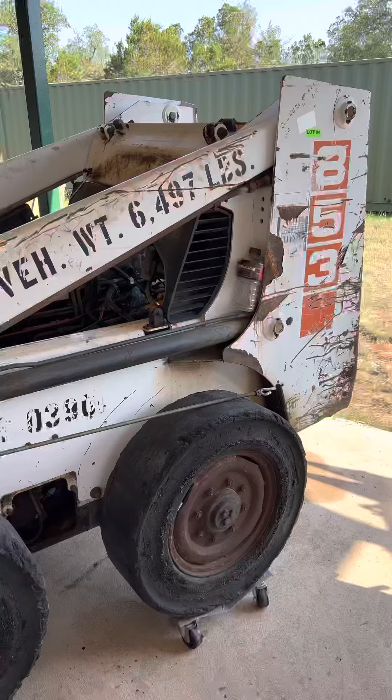So this is my new to me 1993 Bobcat 853. I bought this from the State Federal Property Agency in South Dakota. Brought it back down here to Texas.

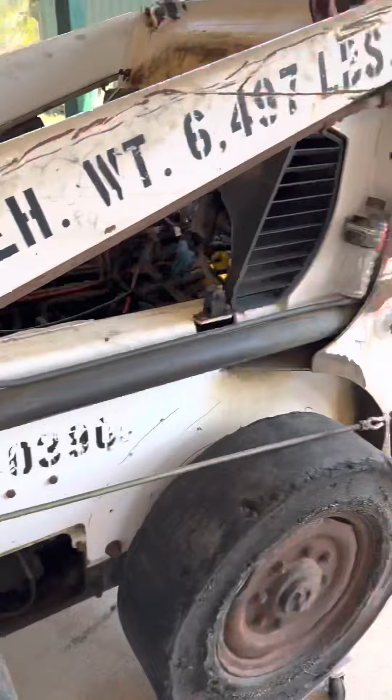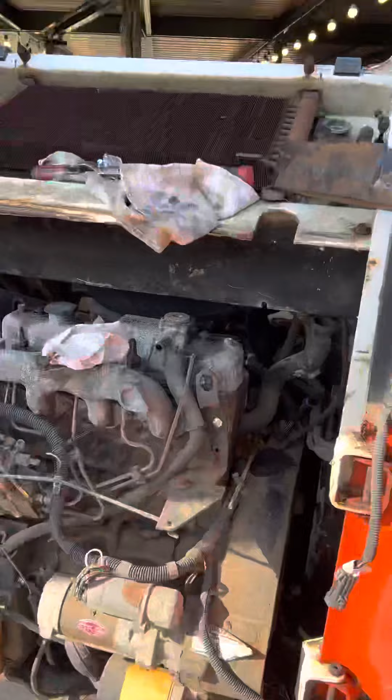I think originally it was a Navy vehicle because they've got all the markings on there with the weights, and also because there's a form in there from NavSup, the Navy Supply Group. So I think the Navy had it first, and then the guy in South Dakota told me they bought it from the state of Georgia, who bought it from the Navy after they were done with it. There's some intra-governmental agency deal. In June of 2020, the South Dakota people bought it from Georgia, and I think it came from UGA, hence the sticker - excess federal property. So UGA had it for who knows how long, until 2020 when they sold it.

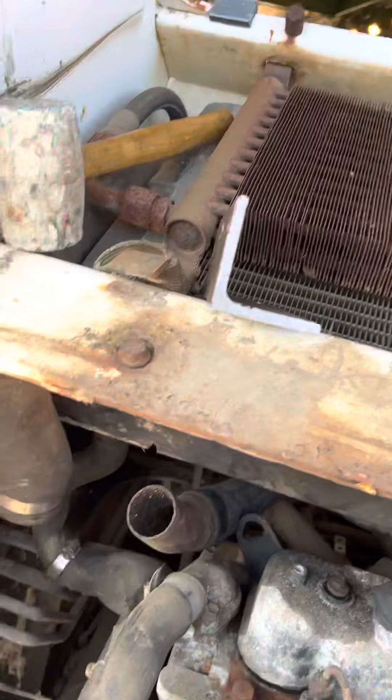The guy from South Dakota said as soon as it arrived in their shop - they buy these things sight unseen - their mechanic looked at it and said, nope, not going to touch it. So it sat in South Dakota for 2 years, from June of 2020 to now, May of 2022. I guess they're prohibited from selling it otherwise.

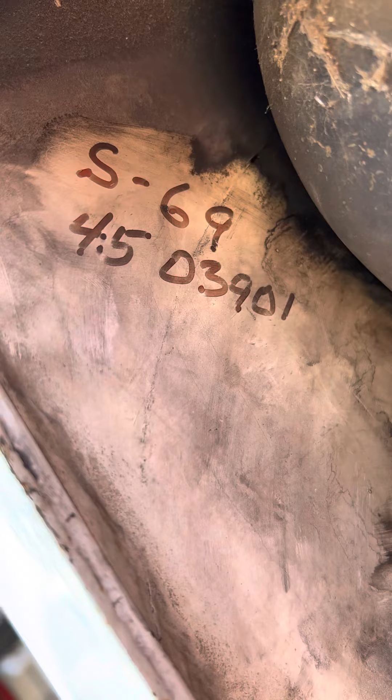If anybody happens to know what these markings are - 4503901 - I'd love to hear that. I saw that also marked in here. Some mechanic wrote that in there. They wrote 4.5, or is it 4:5? Hard to tell. So my goal was to see what it looks like.

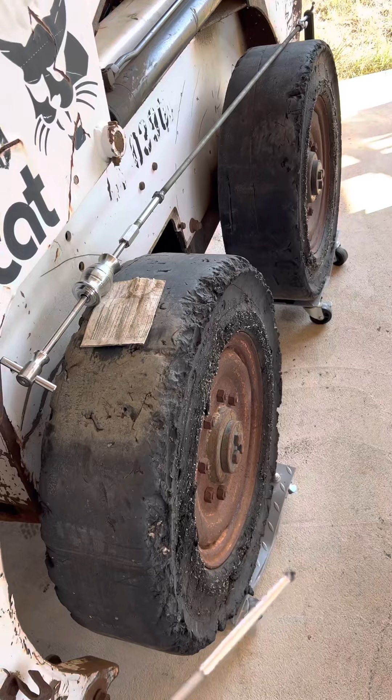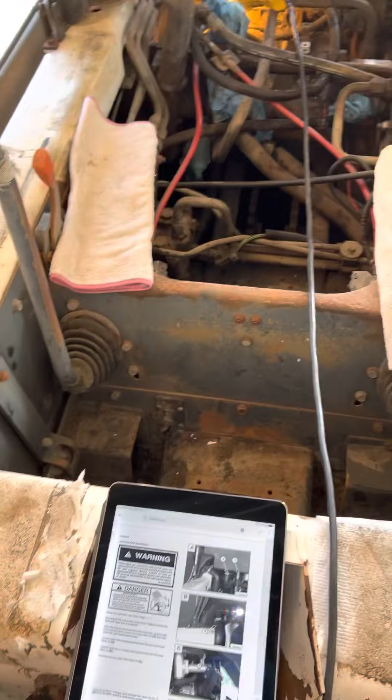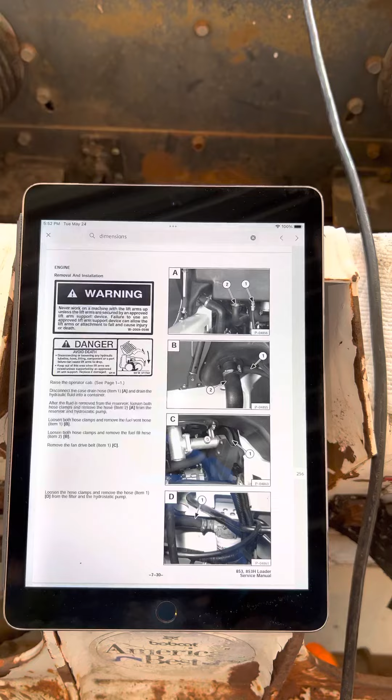Not though - to get the engine out, I got a copy of the manual. So what I'm going to try to do now is walk everybody through getting the engine out using the manual, because I found a lot of videos on how to get it out, but those were just people who already had experience. I've never had a Bobcat before, so I had to get the manual and do it all step by step, and that's where I'm going right now.

All right, so the manual, which you can find on the web - mine falls under here, and there's this version, and there's the electronic control version, and mine falls into this serial number.

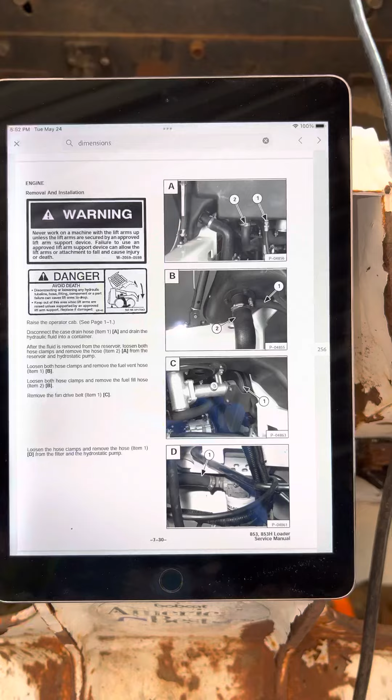So step by step, I'll walk you through where everything is. Raise the cab - well, the cab's over there. I took it off because it was too hard for me, given my ceiling height and my lean-to, to work with it on. And this thing, by the way, has about 3,700 hours, so the meter says.

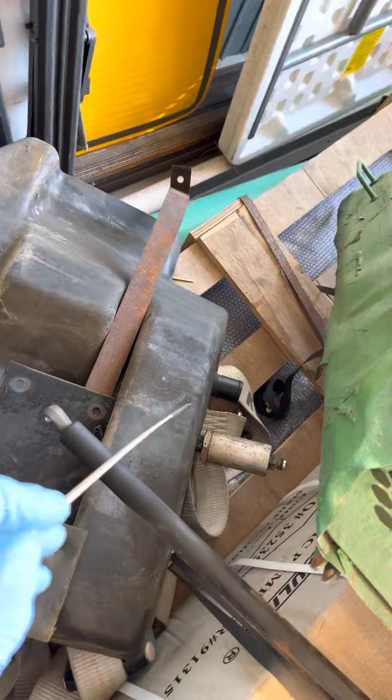Who knows if it's an original meter, but that's what I've got so far. Okay, so raise the cab, that's done. Disconnect the case drain hose 1A - those are the hydraulics. The tank is usually right there, but I already took it off because I needed to get out of the room. This is the back side of the hydraulic tank, there's the top of it, and there's the connector. This was already disconnected when I got it, so clearly people have been trying to work on this. And that's the other outlet they want you to disconnect - pretty easy, take those out, great.

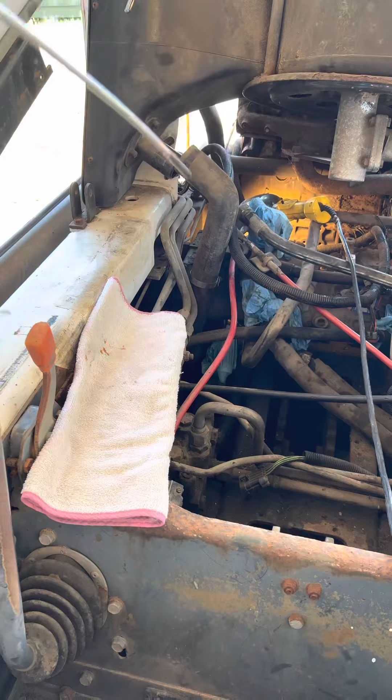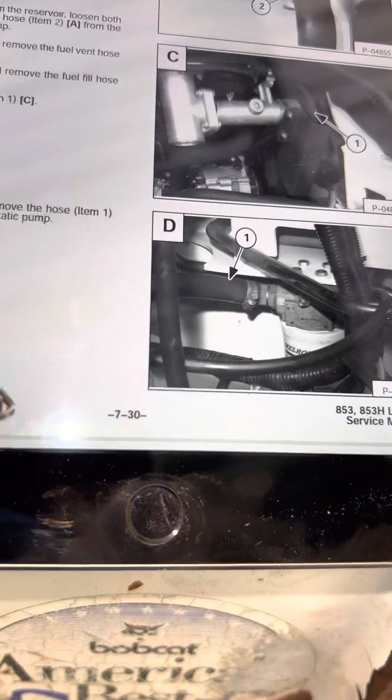Then here on the fuel hose, it says disconnect the fuel hose clamps - those are right there, pretty easy to do. Then you take the fan belt off, right there, pretty easy to take off. Then loosen the hose clamps and remove the hose from the filter and hydrostatic pump.

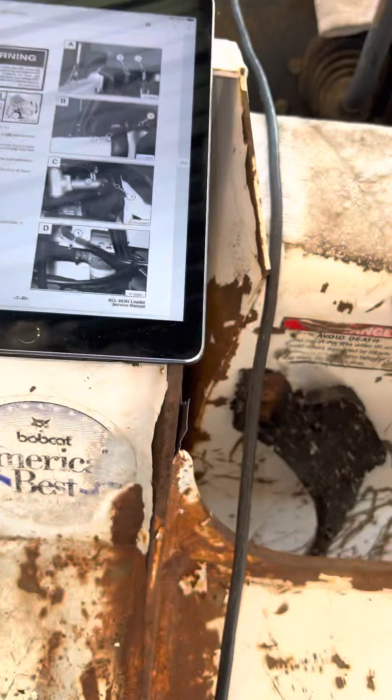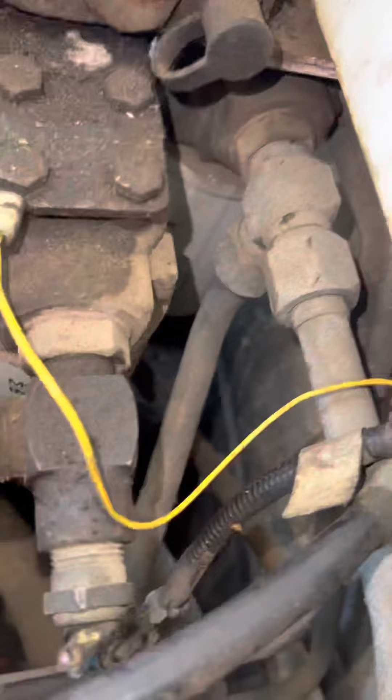Okay, so this was step one of getting very confused, because my model has no hose clamps on any hose coming anywhere near a filter. That's what took me a while to figure out where exactly they were referring to. So on this model - here's the filters, and I finally figured out you've got 4 bolts here and 4 bolts here. It's got to be right here, but then again it's pretty clear - there is no hose clamp right there for sure. So I had no access to get there with any kind of tools I've got.

And on tools, this stuff is all SAE.

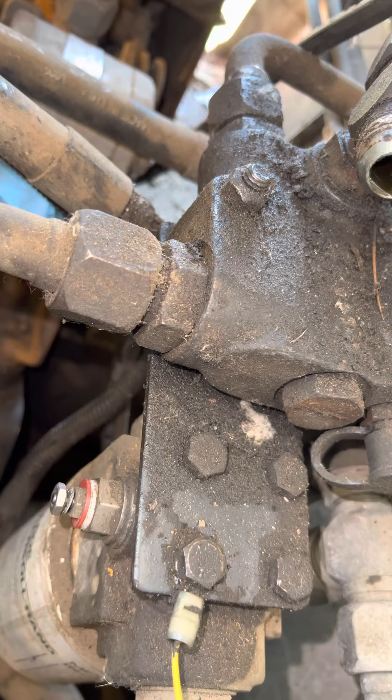So you're gonna need 1 5/8, 1.5, 1.25 inch. There's some metric stuff on the engine because the engine is made by Isuzu, but everything else on the hydraulics, Bobcat has used SAE. So you're gonna need larger inch sizes.

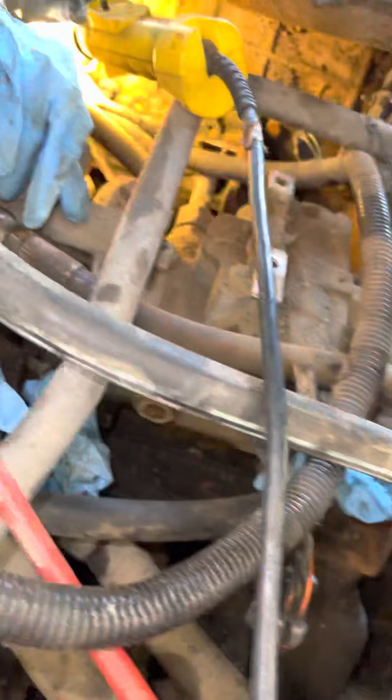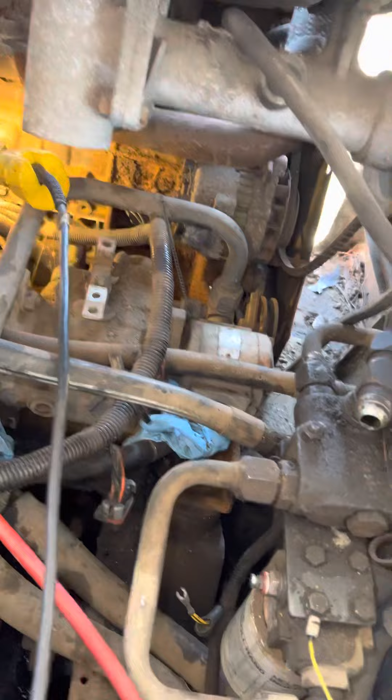Couldn't get that side off, so what I ended up doing was taking the other end, which is that side. So that end of the hose came off, that's fine, because when you take the engine out, the way they have it designed, the hydraulics and the engine are gonna come out together. So if you can't get one side of a hose, get the other. All right, so you got that.

Disconnect the wires. There's some wires down here, no big deal. Let's get those out. There's one right there that connects right here. This ground wire, this part stays with the engine. There's another wire right down here that I've yet to disconnect. That was not on the disconnect part that I could see, or maybe it was, but I've got to get that one off.

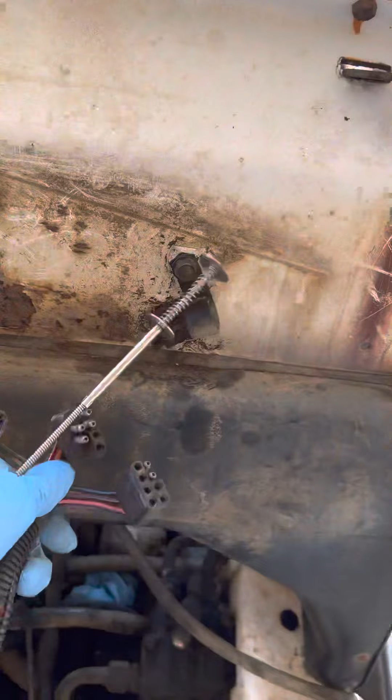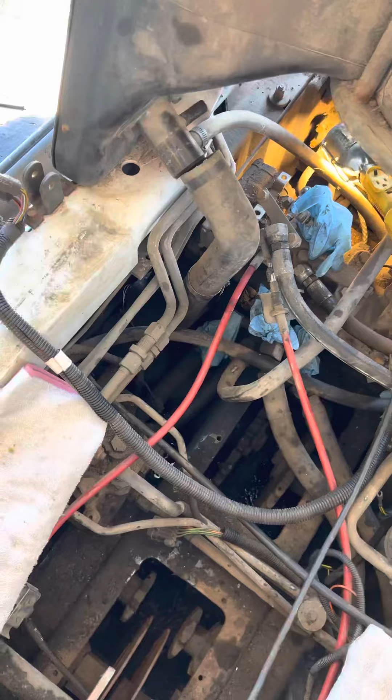Disconnect the electrical harnesses. These are the harnesses that were up here connecting to the cab. There's 3 of them. So as soon as you get those out, they're actually down here now, and it's these 3. They're zip tied, or they're screwed in right here, like that, and it's these 3 harnesses. I had to put some lubricant on there, some dry lube, and then use 2 sets of pliers to get those things off because they were stuck.

Okay, wires are out. There was no ground wire. It mentions disconnect the ground wire, but I didn't have a ground wire.

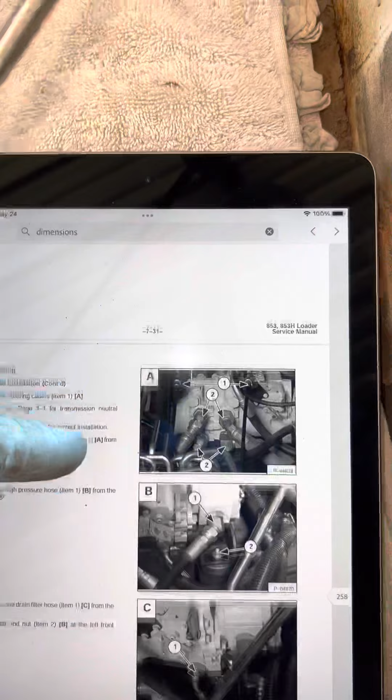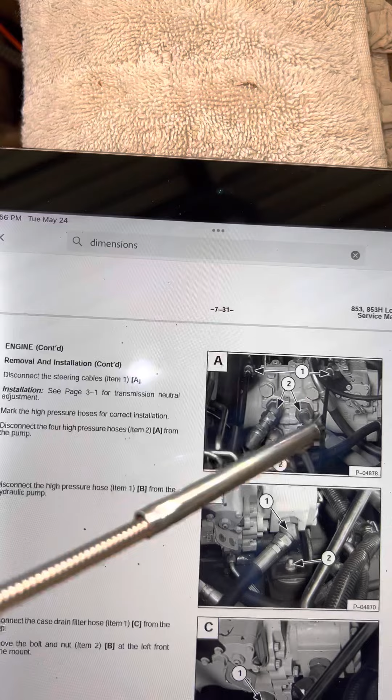That was pretty simple. The big problem came when it shows you this picture right here, and it says disconnect the, it says mark the high pressure ones, they're big. Mark the high pressure hoses for correct installation, and then disconnect the 4 high pressure hoses marked 2. So that was the big sticking point because in my version, I don't have 4 on one side. It's these big hoses right here. This goes to the left side.

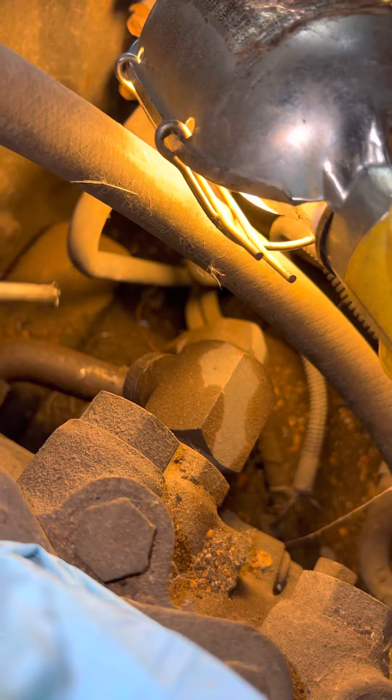They're fairly easily gotten off from here. There's one there that connects to there, and another one down to here. But the other 2 were the problem, because the other 2 are on the back side, way back here. So this one was attached right there, and I was able to get that guy off, and you're going to need every bit of country mechanic creativity you can get to get access to that guy.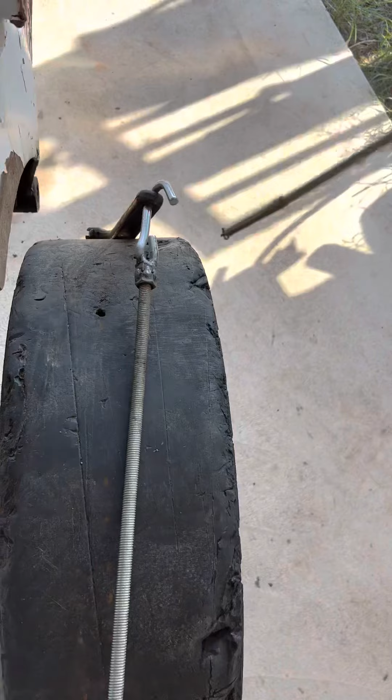I ended up welding a hook onto a slide hammer I had, onto some extra threaded rod, and I could use that threaded rod to put on the end, or the hook to put on the end of that wrench there, because I had big metric wrenches. I didn't have any big SAE stuff. So putting that together, putting the hook on there, and using the slide hammer allowed me to get the right angle to get that off.

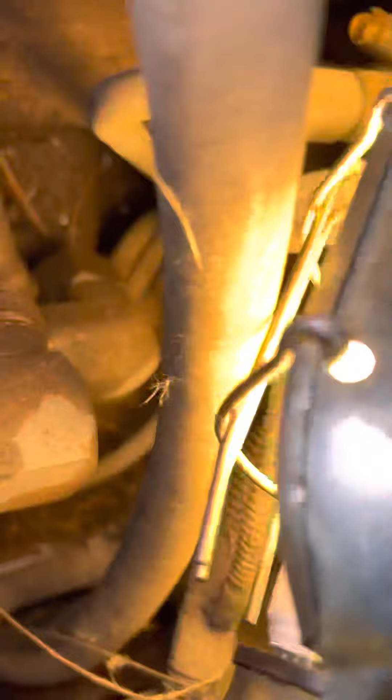So that's 3. The problem one is number 4, and number 4 is still right there. That guy, he's still on there because I don't know how in the world you can get any kind of access down there. So that was impossible.

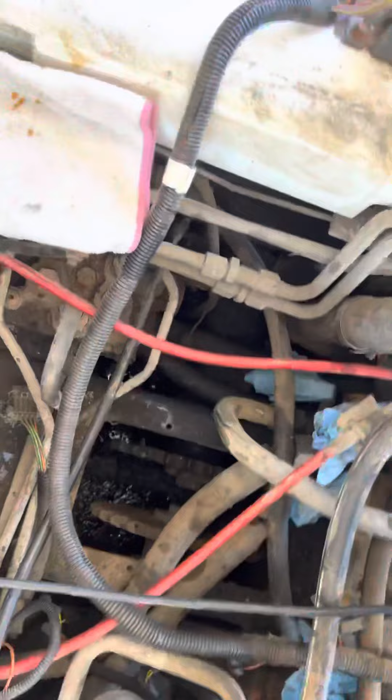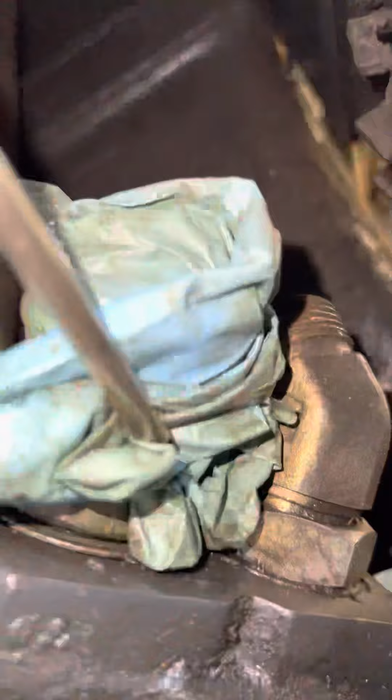So if you can't get that side of it, obviously you got to go back to the other idea, which is go to the other end of the hose. And the other end of that hose is down here. And of course, as luck would have it, it's not the first hose you see, it's behind it on the second part. It's connected back here. So you got to take this front part off, all right, which I did.

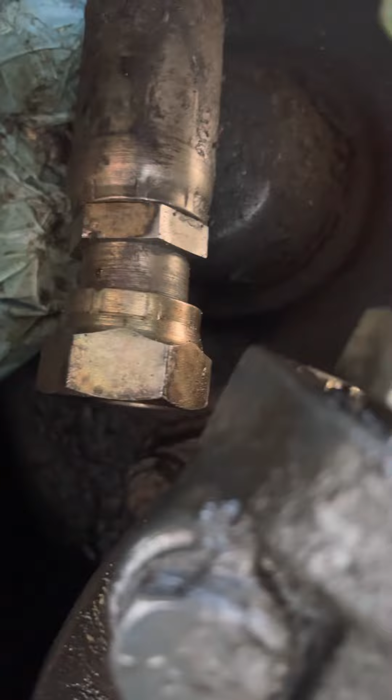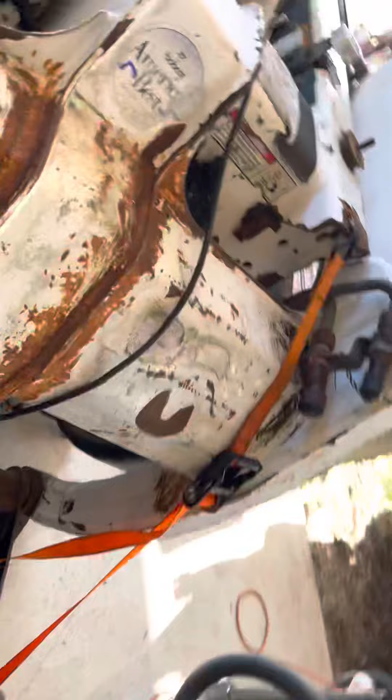And you can do that, and these are pretty big hoses. I thought I was going to take these adapters off, these swivel adapters. I didn't have to. I ended up being able to get that guy off because he was easily accessible. And then from here, you could get both up and in, and get access from right here, from this angle. And that's the second hose right there. You can see the top of it. And I got that through in here.

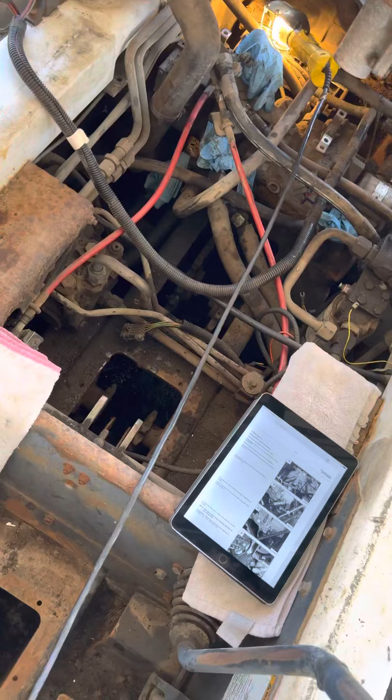Now, looking at that chain, you'll see another special bonus. This was a freewheeling version of the 853, and I say freewheeling because when I bought this, those chains right there were loose down in here. So this guy clearly had a lot of love coming. I think there's 4 chains, 2 on this side and 2 on this side. One goes there, one goes there, one goes there. I don't know if that's 2 of them or one that's broken in half, but clearly I'm missing some more chains.

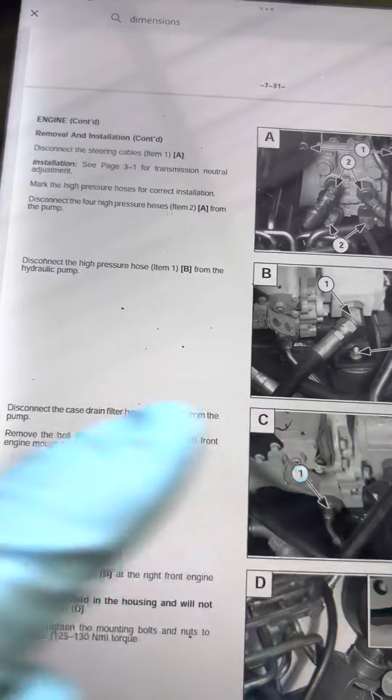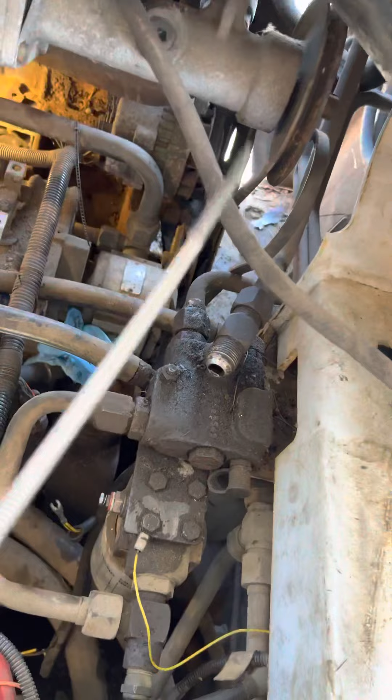Once you figure out what that is, that's not too bad, but it took a while. Then you disconnect the high pressure hose from the hydraulic pump. That's right here - not too bad, except it's angled. I had to get one wrench held up this way and use the pressure that way because it's kind of curved, and then I was able to use the big crescent wrench I had to get access to that.

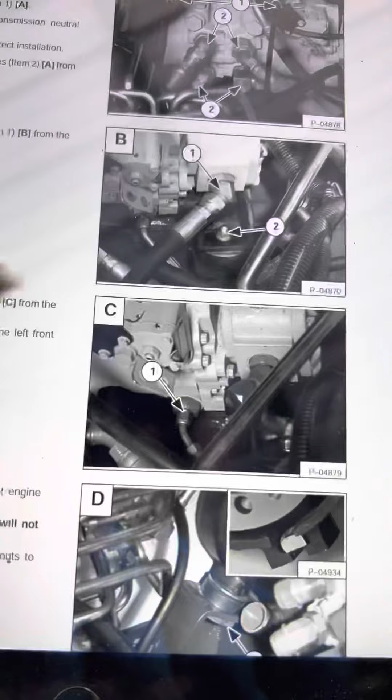The case drain filter hose was pretty easily found. That wasn't a big deal.

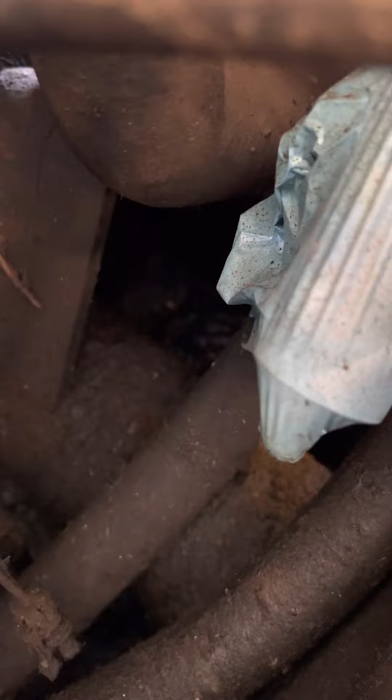Then you're down to the engine mounts. The engine mounts are easy, so to speak. One was down there, rusted to heck. Couldn't turn that, got a plasma cutter, tried that, couldn't use that. Ended up getting the Sawzall and cutting that one off. As difficult as that one was, the other one on the inside was easy because it wasn't bolted in anything. So it was equally difficult as the first one on the left side, but the right side was a lot easier. Okay, so those two came out, and now you go to the back side of the engine.

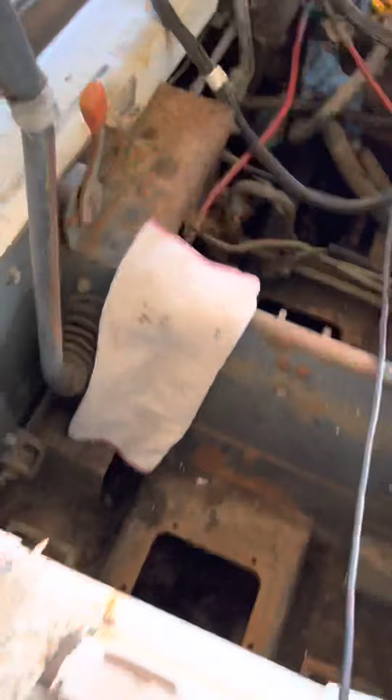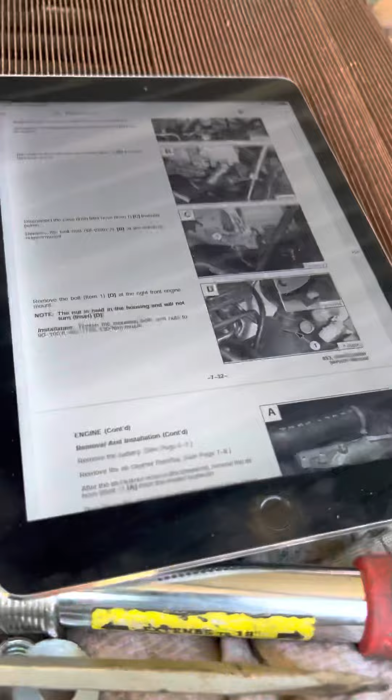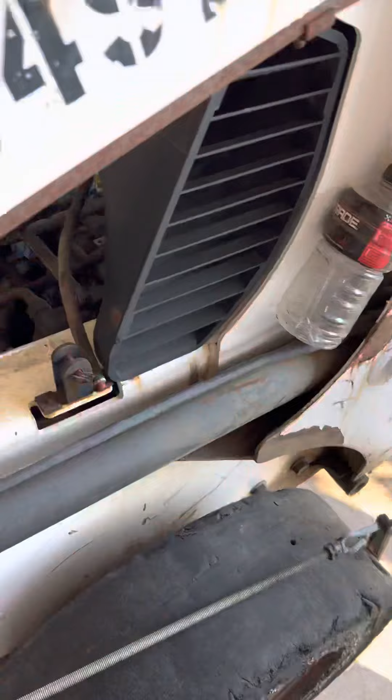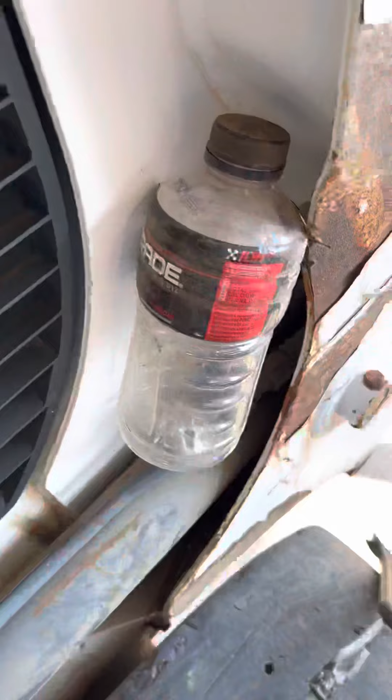All right, remove the battery - oh, that was another exciting part. Give me a sense of how old this thing is: this battery is dated April of 2001. That's one sense of how old it is. The other sense I got was there was a 6-pack of empty Bud Light and a Powerade, and the Powerade is from January 23rd of 2012, as were the best by dates on the 6-pack of Bud Light. So Bobcat maintenance guys must love Bud Lights. This thing hadn't been looked at, or has been in need of repair, since 2012. Who knows if it was dead before then - so at least 10 years it's been in need of some kind of repair.

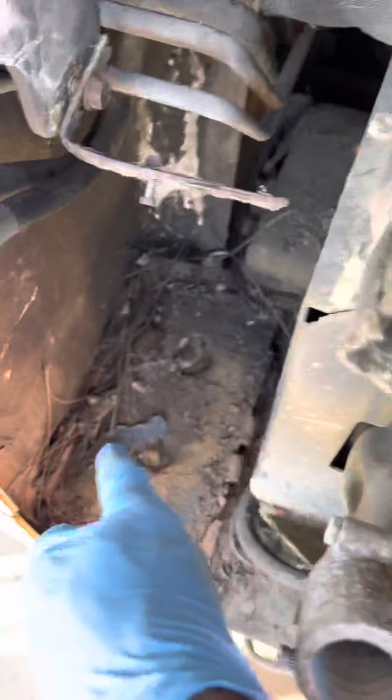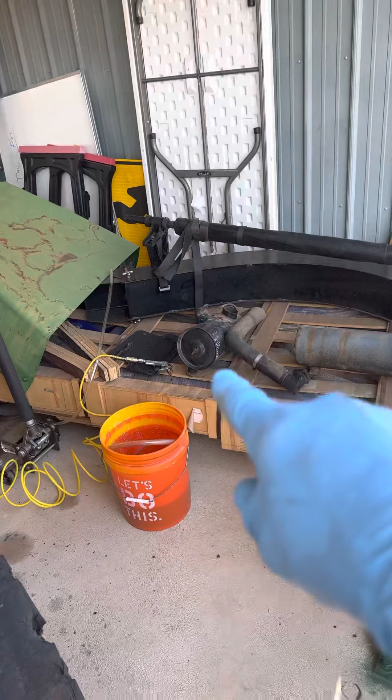All right, now that you're back here, remove the battery. Battery's back here, that was all kind of corroded - pretty straightforward. Then you remove the air cleaner housing. It was right here, that piece right there. Took that off, pretty simple.

Then you take off the air horn, which is the thing that bolts onto here, then connects to the air hose - it's the thing still attached to the hose over there. You can see it right there. Air horn comes off.

Then, let's see, plug the intake manifold, did that. Remove the rear grill, that's the thing up here. There are just two pins you pull out here, one there, and that guy comes off. Not a difficult thing at all.

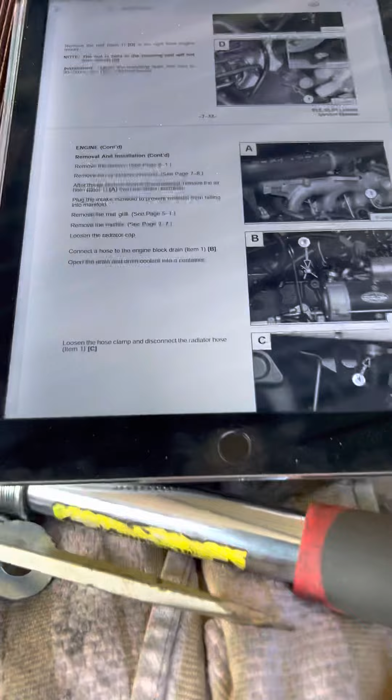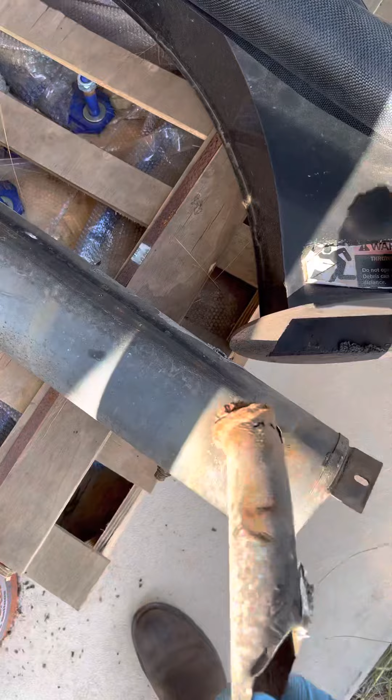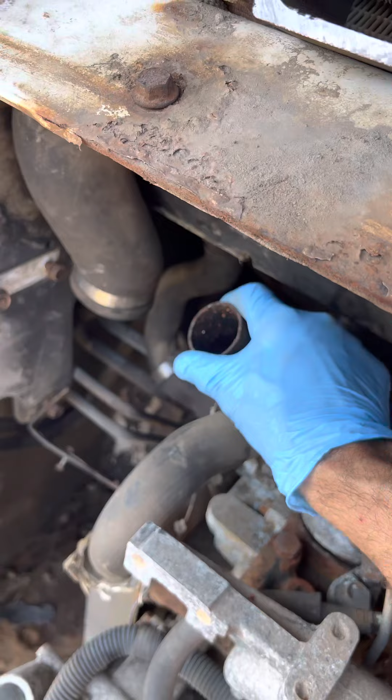Remove the muffler - this muffler is right here. I got one of the special edition 2-part mufflers with my Bobcat. You say, what exactly is that? Well, that's a muffler that comes in 2 parts, so clearly you're going to be needing a new muffler as well. Once you unbolt that, it comes out pretty easily, and then you have to kind of bang this - this is just fit in with those clamps, and my clamps had totally rusted, given the age of this thing. So that'll have to be replaced with a new muffler as well.

Okay, loosen the radiator cap - well, that was easy, I didn't have a radiator cap, so that was not a problem. Connect the hose to the engine block drain, open the drain and drain the coolant - that actually was pretty easy. Here's the drain connector, I put the hose on, but it was like one drip every 10 seconds, so I unscrewed the whole thing, it all came out, put a hose on, and then it drained out. That was pretty easy.

Now loosen the hose clamp and take the radiator hose off at both ends. One end of the radiator hose is right here, that's pretty simple. The other end is right there, also pretty simple. That came out.

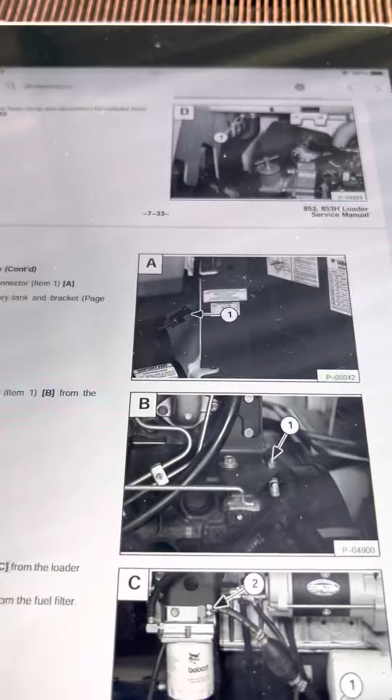Disconnect the electrical connector, that's this guy right here for the lights. That's simple. Remove the coolant recovery tank and bracket.

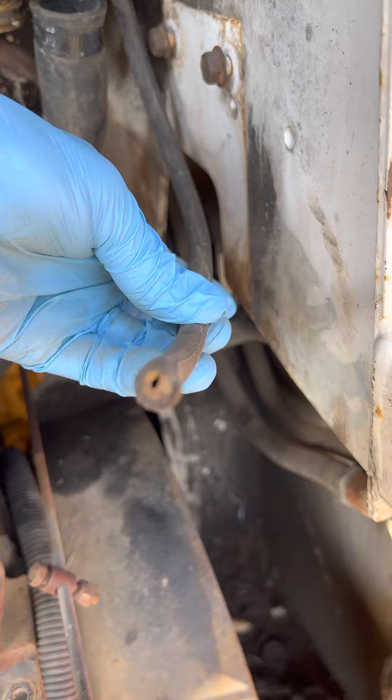That goes right here, and it's this little U bracket. I don't see where I put it, but I did not have a coolant recovery tank. Don't know if that was not standard, I have to imagine it was. So I think at some point, oh yeah, sure, here it is, that's the hose for it. And the wasps, like everything else, plug that up. So I will need a new coolant recovery tank once I get done with everything.

Okay, disconnect the throttle linkage. That's this right here, sorry, that's this right here. That attaches right there.

From the bell crank, disconnect the ground cable. That's down here, ground cable's attached right here. I put the bolts underneath so I don't lose them.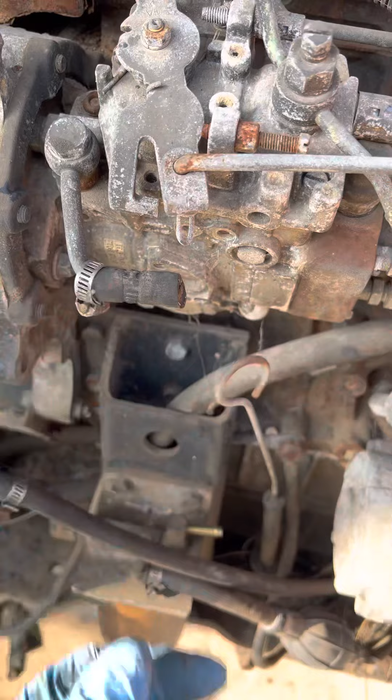With the ground cable off, you also disconnect this fuel line from right here. It comes out, and this guy was right here. It comes out. This was already cut, so I don't know how and where that was going to go. I'll have to figure out the schematics on the fuel lines once I put it back together.

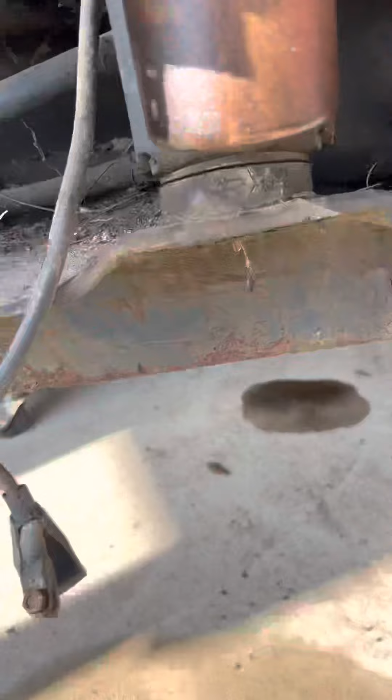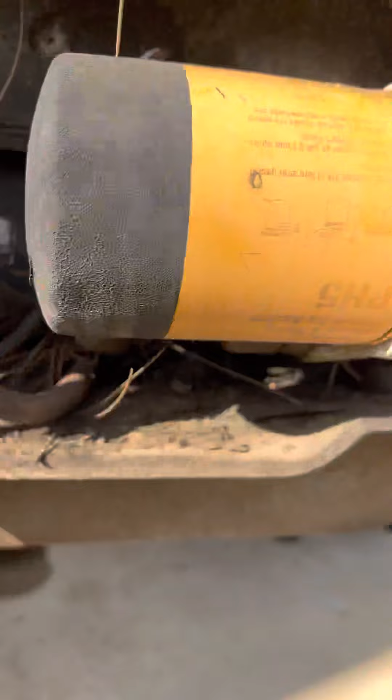Okay, fuel hose is done. That's the fuel return hose, got that done. Left engine mount and bolt, and the right engine mount and bolt, those are pretty easy too. The left side is right here, and the right side is right there. And that little thing needs to come out, that's just the sleeve for it. Mounts are shot, they're gonna need to come out too, as is everything else around.

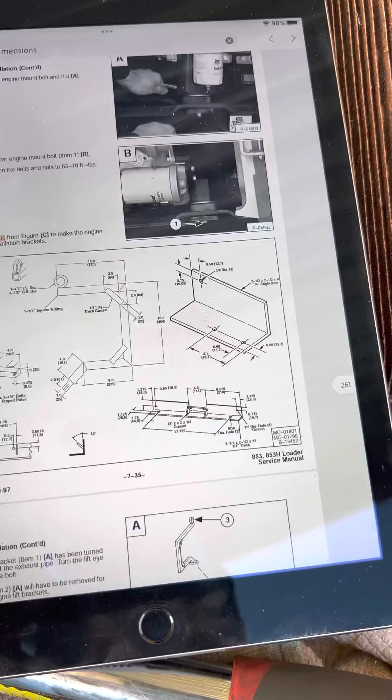Now it says this is where it gets kind of fun. Use the dimensions from figure C to make the engine removal and installation brackets. So I'll let you stare at that for a second, you can do a screenshot if you need your measurements. And what you're making, I made it and I'll show you what it looks like, but it's this. You're welding that together, then you cut that, so it's 3 different pieces you're gonna end up with.

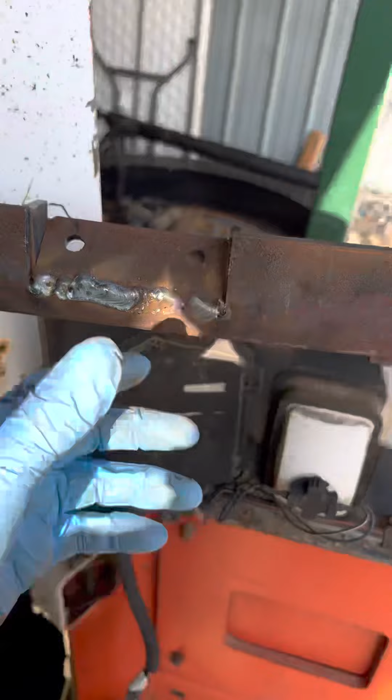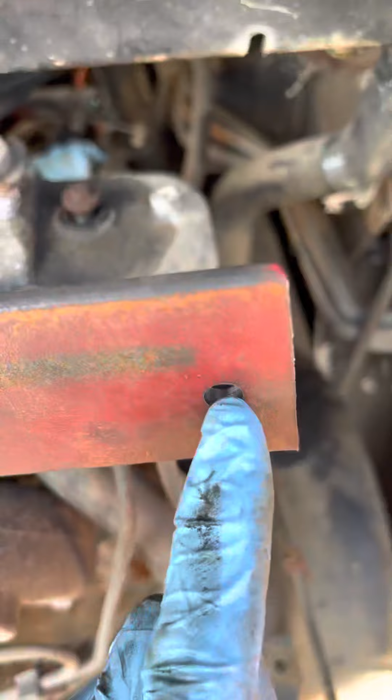Here is the bracket. This will go behind the cab, and this bolt here will attach to the engine lift position spot right here. And this hole here attaches to another piece I made, it's on the instructions, this piece here. So these 2 holes bolt to the engine right there, and that hole bolts to this guy like this. So then this is attached to this, which is attached to the engine, and this side is attached to the engine too. Now you have it firmly attached like this, and that's where this guy comes in.

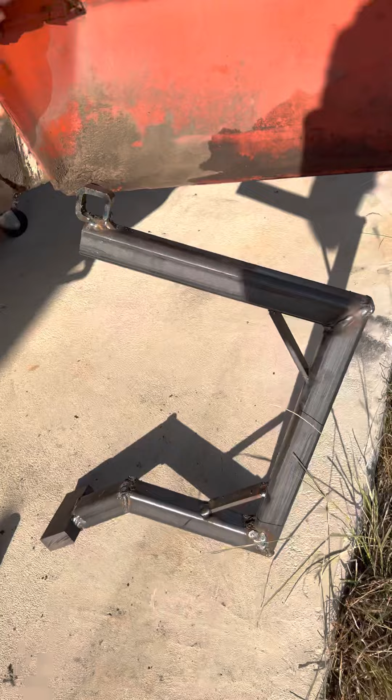And this guy is just 1.5 inch tubing. They way over-engineered this, and that is 1 inch thick steel that you then have to tap 3/8-16 holes into. Then you angle that as such, and it fits in like that, and you bolt them in like that, and then the whole thing fits like that. Then you lift the hook up on that guy, lift it up, and out she comes. At least that's what's gonna happen as soon as I get done with this.

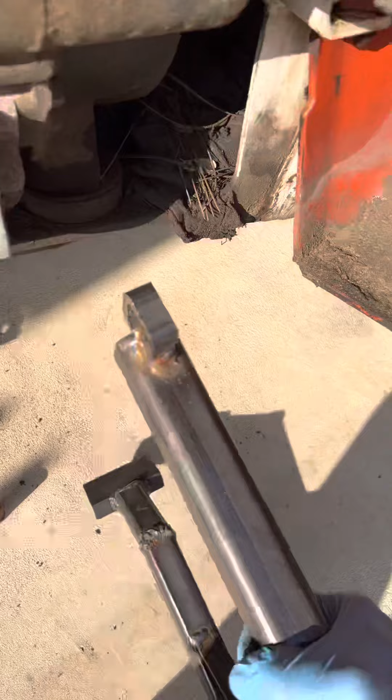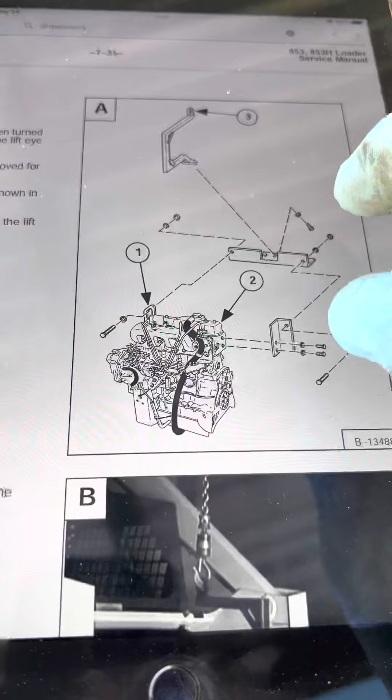So that was pretty simple. Not easy though, that was a lot of cutting and welding and finding the right thickness of tubing. I'll let you get another shot of that if you need it. And so that's pretty much it, and then it shows how you lift it like that.

Other items of note, that's about it. I mean, there's so much work on this thing, it's gonna be needed. One exciting part was when you have to take the rocker cover off to get this piece here on, because this blocks it. When I took the rocker cover off, I did notice one of my arms inside was already broken, so that was kind of exciting. Yet another thing that was broken, and hopefully that was the only thing broken in there, and that's maybe when they made him quit, because they could hear it not working. Don't know, we'll get more done when we start tearing it apart and see what it looks like. But that's how you get the engine out, and good luck with it.